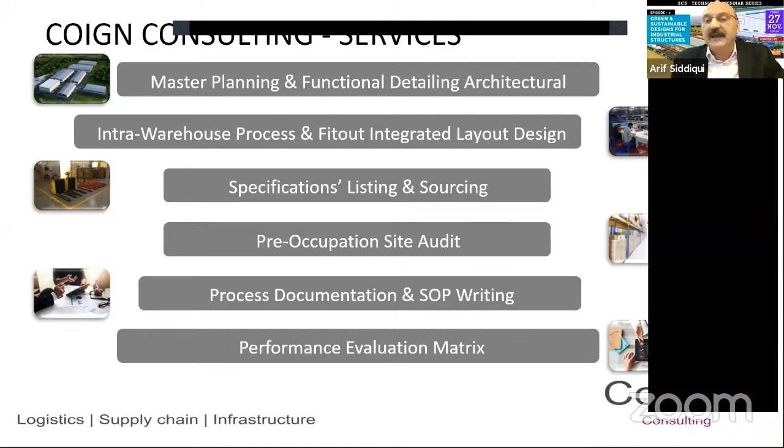Just to quickly mention what we as an organization do: Coign Consulting provides master planning and functional detailing architectural services, intra-warehouse process and fit-out design, designing pre-occupation site audits, and performance evaluation matrix as part of our various services. We serve various industry segments including developers, pharmaceuticals, chemicals, e-commerce, automobile ancillaries, FMCG, and heavy engineering. These are some of our clients across various sectors.

The project we are here to introduce is the SIA Infralogics LLC project, a standalone building in the city of Raipur. SIA was established in February 2017. The main objective of the company was to develop sustainable infrastructure in various parts of the country, which would then improve the overall efficiency of warehouse operations.

This facility is in the Naya Raipur area, where Raipur is amongst the cities that have been declared a smart city, focused as a 21st century city with the socio-economic and cultural life of Chhattisgarh, basically to improve the overall status there in the city.

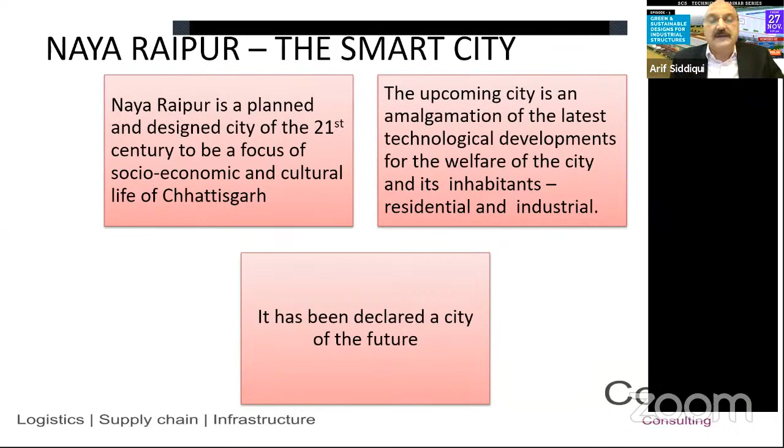The project overview: it lies in the south of NH53, about 1.5 kilometers away from the city. It's typically an integrated warehouse facility for ambient and air-conditioned storage. Total development is about 147,000 square feet. Warehouse capacity is about 131,000 square feet, and the land use is warehousing.

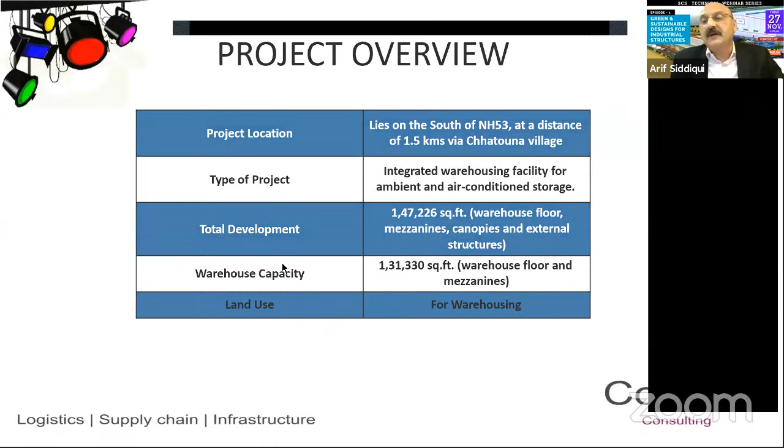The overall purpose of this facility, in terms of the green initiative we've taken, is to create a sustainable design in line with green building concepts to fundamentally reduce the overall impact of the building on the environment, improve human and worker health in the operating environment, and ensure the natural environment is enhanced through efficient use of energy, protecting occupants' health, and improving employee productivity. Obviously, reduction of waste, pollution, and environmental degradation has always been the key objective.

In a warehouse where we feel only a few people work, you'll be surprised to know that in a 100,000 square feet facility, there are sometimes more than 300 to 400 people working. Therefore, human health becomes a very important aspect and element as part of the green concept.

So green buildings predominantly focus on energy efficiency, water efficiency, a sustainable site, and material and resources. All these elements put together form a nice conceptual mix, the reason for creating green buildings.

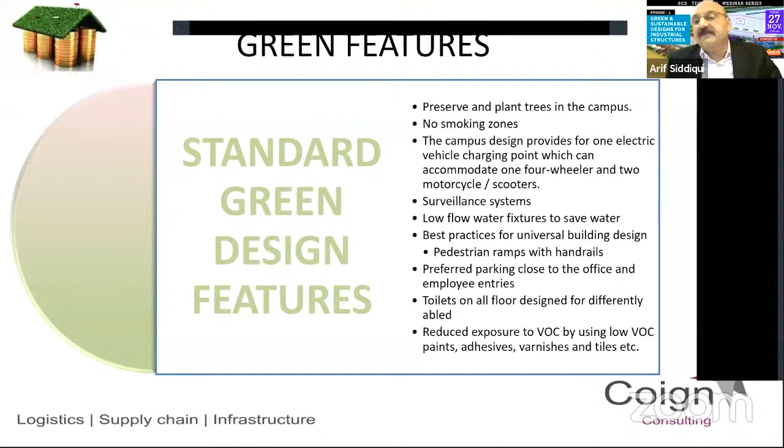Post-occupancy waste management is another very important focus of the design, making sure we separate waste bins for biodegradable and non-degradable waste. In warehouses, huge amounts of waste come up, especially packaging waste, so specific emphasis has to be put on segregation of recyclable and non-recyclable waste so they are easily segregatable.

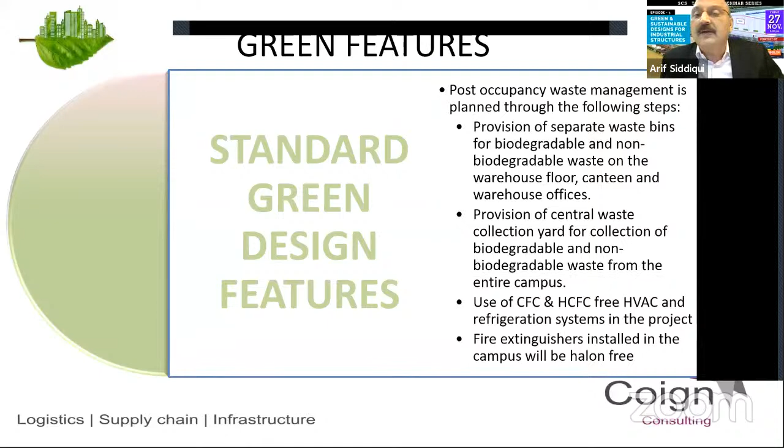Provision of central waste collection yards, use of CFC and HCFC free HVAC and refrigeration systems, especially for cold storages and air-conditioned warehouses. You can imagine the tonnage of refrigeration needed to cool 100,000 square feet of warehousing facility that is 14 to 15 meters tall, and the impact that careless CFC and HCFC mixes can have on greenhouse gas emissions.

Other important features here include use of local material, specifically sand, stone, aggregates, and bricks, to reduce pollution generated by trucks bringing material from long distances. Also, in terms of concrete, the use of locally sourced concrete as per project requirements.

Also, we need to make sure all local resources like cement, glass, wood products and tiles are sourced as locally as possible, so as to reduce the transportation leads that otherwise add up to a lot of carbon emission.

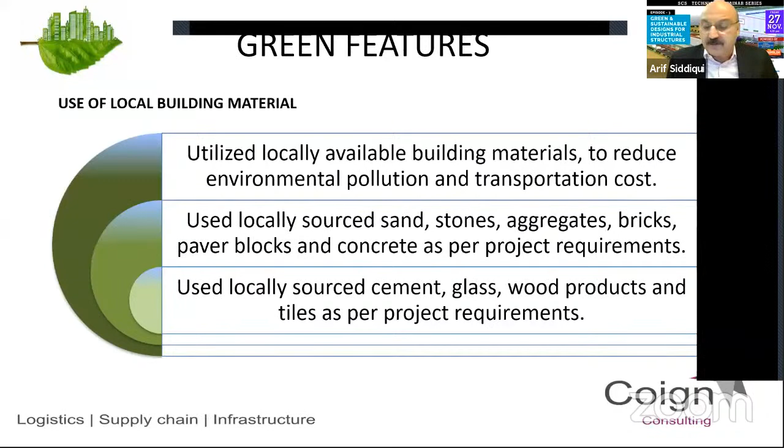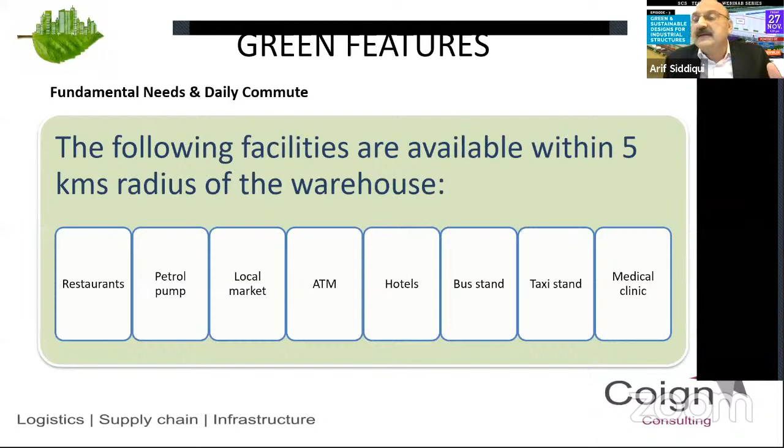The project has provided a lot of amenities for the fundamental needs of clients and people working in these warehouses. It's the client's endeavor to promote cleanliness and basic hygiene. The primary facilities within the campus are medical facilities, canteen, water drinking facilities, driver dormitory, and washrooms. Also, within a 5-kilometer range, there are restaurants, petrol pumps, hotels, and ATMs, so people don't have to drive long distances for day-to-day needs.

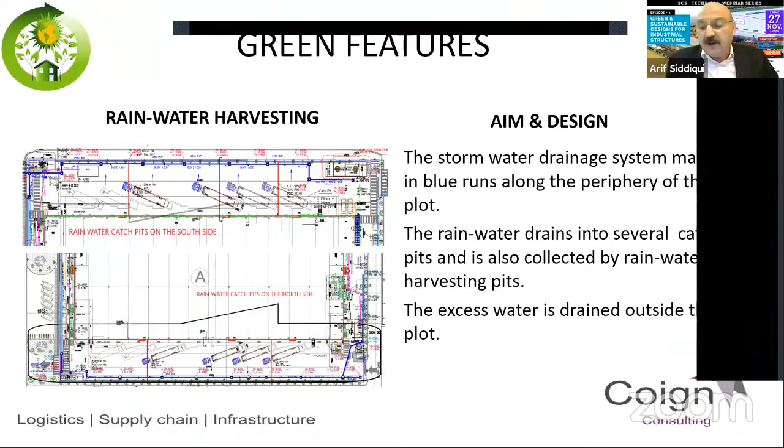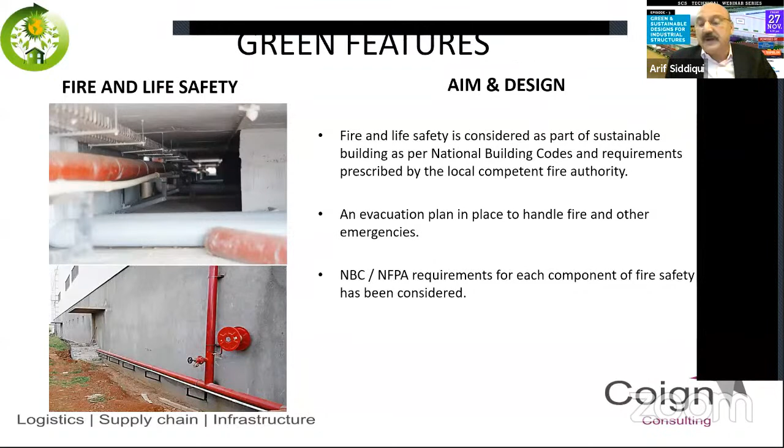Fire safety systems are designed to ensure safety of life, cargo, and the building. Fire and life safety is considered part of the sustainable building design, as per National Building Code requirements. Total evacuation plans, NBC and NFPA requirements are fully complied with to make sure goods and humans are taken care of, along with vehicle parking provisions for good, safe, and dedicated parking for different types of users, specifically trucks.

Traffic movement is all unidirectional so there is no conflict of vehicles. Large trucks have huge blind spots in the front, rear, and sides, so unidirectional movement is the safest method of travel, with bikes and cars on one side and trucks on the other. The design isolates human traffic of small vehicles and bikes from goods carriers, which are heavier vehicles, with unidirectional flow avoiding any conflict from U-turns and two-way movement.

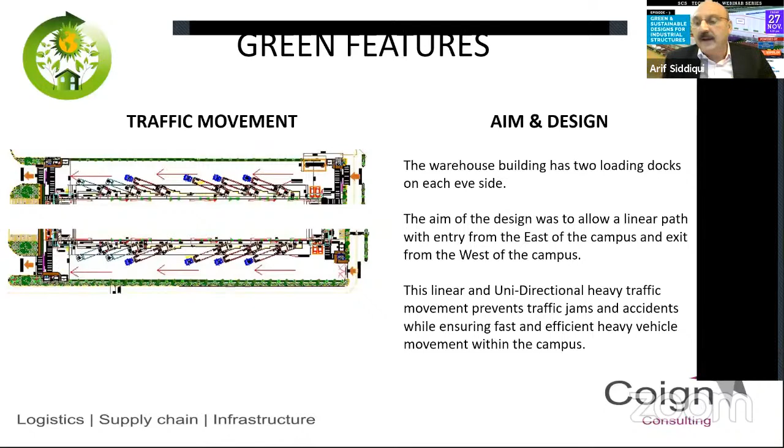Efficient loading and unloading bays are an extremely important element that helps optimize material handling and reduce lead time. It leads to huge safety gains and efficient loading and unloading of vehicles and material, and most importantly, worker safety. So you get speed while staying safe when moving material or loading vehicles.

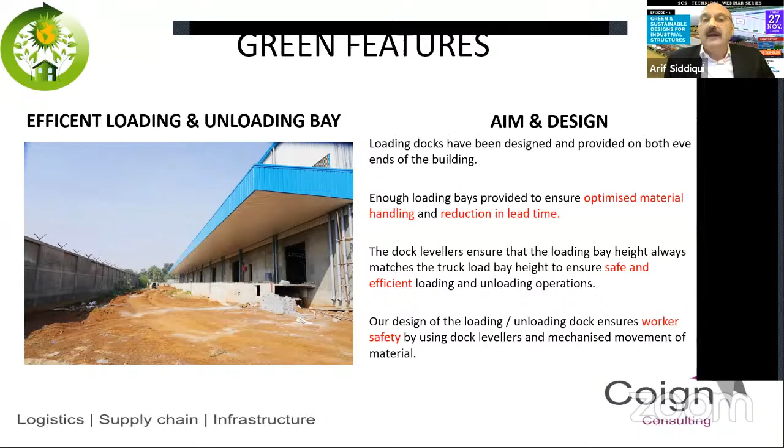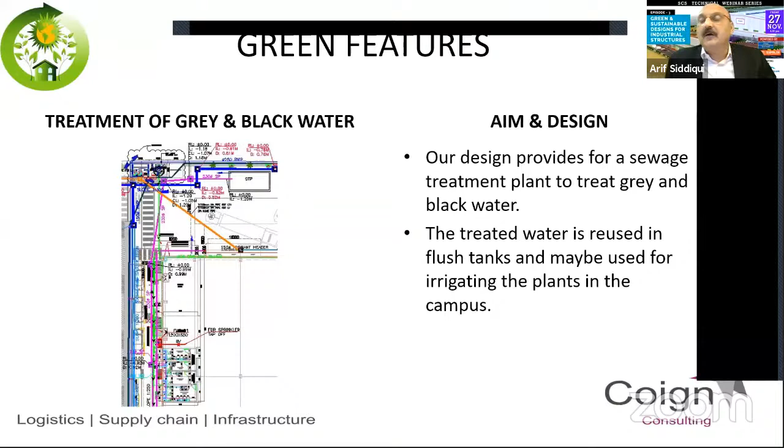Treatment of gray and black water is very essential. Sewage treatment plants are needed since potentially 200 to 300 people can be working in a facility of approximately 150,000 square feet, and the wastewater generated needs to be treated and recycled. So there is a provision for a sewage treatment plant which treats the water.

Here are some energy management systems, like natural lighting. These are continuous strips of natural skylights which help reduce electricity consumption during the day and optimize the use of natural lighting. The insulation you see is bubble wrap insulation, which helps reduce internal building temperature.

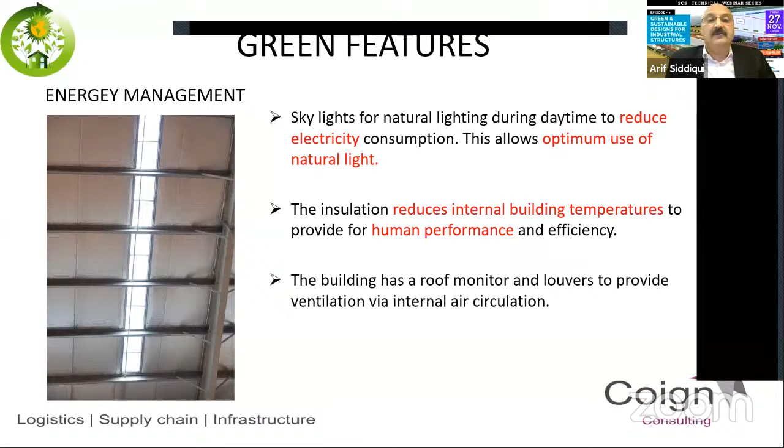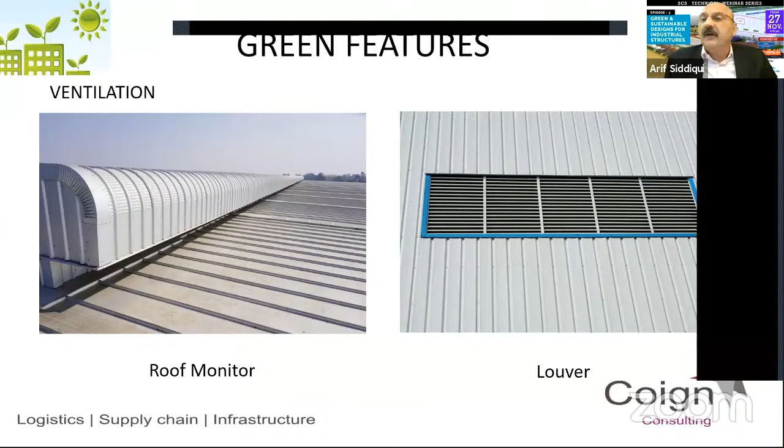This tremendously improves human performance in a warehouse. We have seen efficiency of human workers in the warehouse grow by over 30 to 35% just by ensuring proper control of temperature. This is a non-energy-consuming method for good air circulation, using ventilations like roof monitors and louvers for ingress of air, and roof monitors for evacuating or ventilating air outwards.

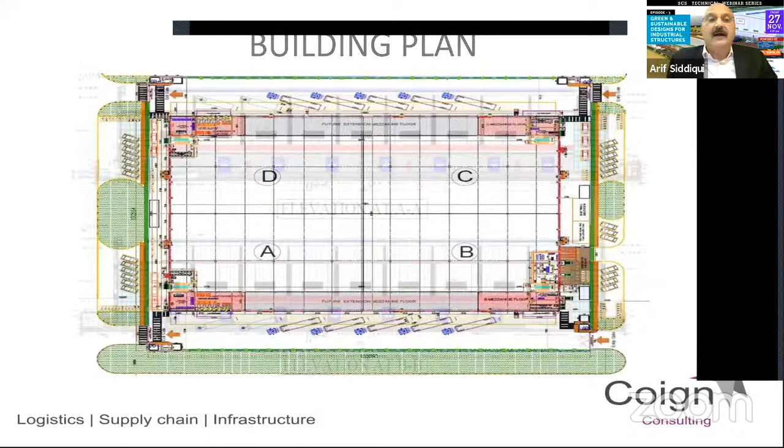Thank you very much. The key, as I said, is to ensure that even small manufacturing and small warehouse developers are able to get sustainable infrastructure developed. Sustainable infrastructure is just about these few details.

It's not about investing lakhs and crores of rupees extra. It's just ensuring that you are able to take care of human safety, material safety, and ensure that all environmental elements are within control and within the green building concepts and guidelines. Thank you very much.

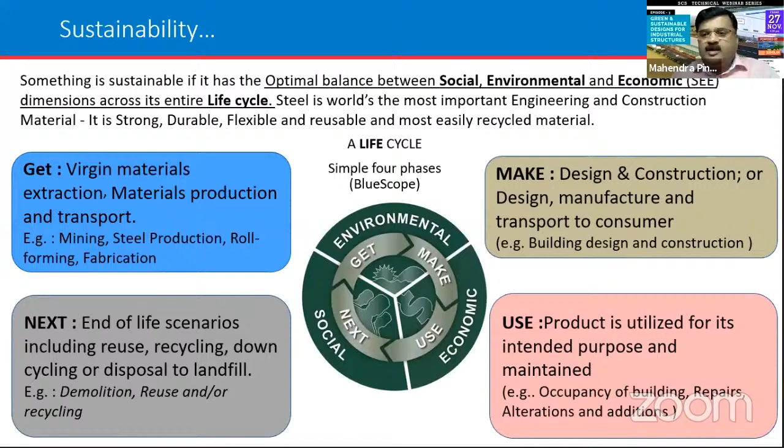Tata Steel BlueScope Steel are big companies having a joint venture between Tata Steel and BlueScope Steel. Since 2005, this company exists in India and manufactures coated steel products and PEB buildings for construction and all types of applications. These companies focus on safety, manufacturing excellence, quality, innovation, and research and development.

Now coming to the topic of material selection for roofing and walling. I am giving some tips which can help architects, consultants, or specifiers or end users who are not going through the architect channel - the consultant channel. They give the building to PEB contractors who build the buildings, but they have to be aware of what kind of material gives durability so they can have less or zero maintenance over time. There are different types of materials - I won't go into old thatch roofs, but we talk about coated steel versus aluminum. Aluminum sheet is also used for roofing applications along with zinc aluminum alloy coated steel, or color bond steel.

Mr. Kulkarni, I feel we have lost Mr. Mahendra Pingle's connection. Oh yes, he's back. Hello. Hello, yes we can hear you, Mr. Pingle. You are reconnected - can you please start sharing your screen? Yes, okay. Yes, okay.

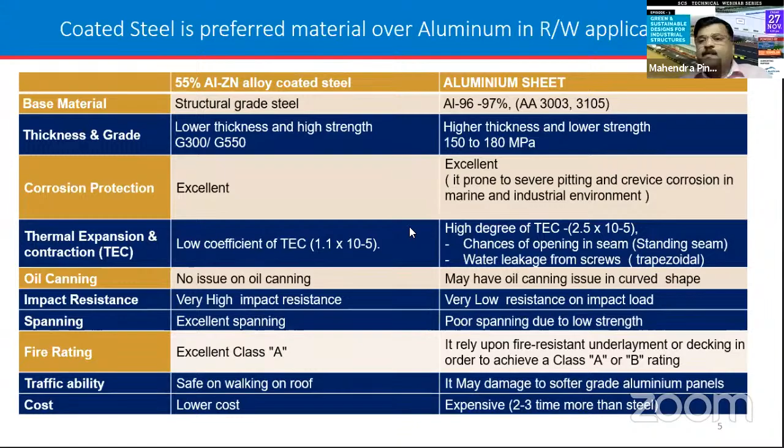We've lost him again, I suppose. Connectivity issues, I think. Shall we go to the next speaker and get back to Mr. Pingle later? Yeah, that would be better. Mr. Pingle seems to be having some connectivity issues. I think he will positively come back, and then we can continue with his presentation.

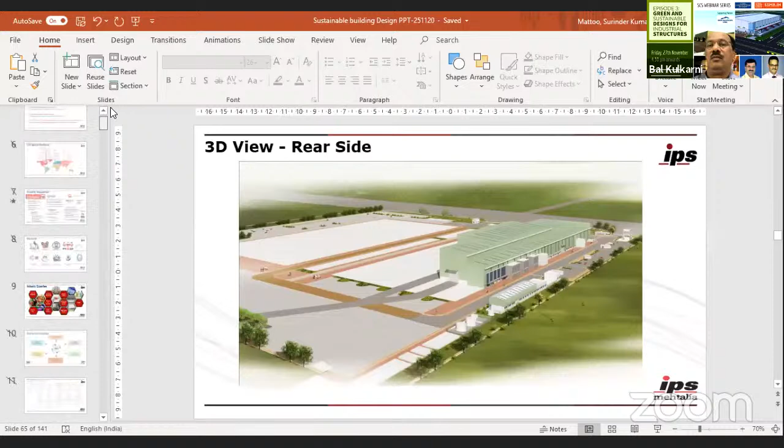Mr. Pingle is back. Good evening, everybody. This is a great pleasure to discuss our capabilities and the prestigious project we have done with Godrej Boyce at Dahej.

Mr. Arif has touched upon green building initiatives very discreetly, and we are not away from that. We also believe those are the current requirements of the industry, that we have to be sustainable and use all initiatives towards a green building concept.

So I will take some time to introduce IPS Mehtalia to all. Our safety logo, Mission Zero, is committed to an incident and injury-free workplace. We care about our employees' safety as well as project safety, so we inculcate all safety measures into our detailed designing while we go forward for any project.

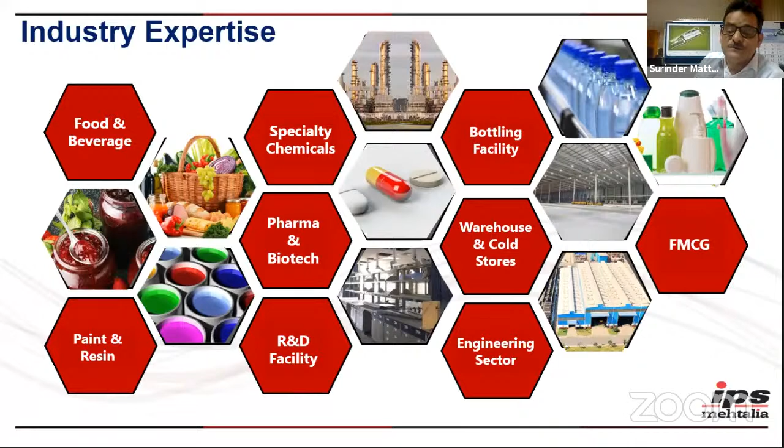These are the sectors we are into: food and beverage, paint and resin, warehouse, cold storages, engineering sector, FMCG. We'll be discussing the engineering sector project. This is our pan-India presence for industrial projects, where Godrej Boyce is one of the prestigious projects for us.

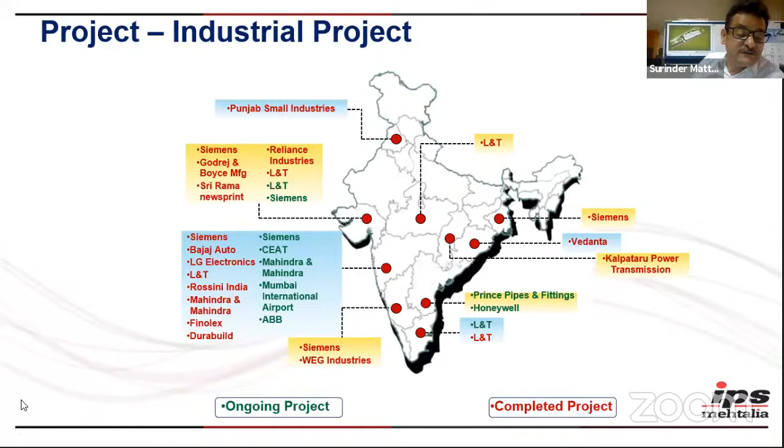So again, the sustainability areas we take for different projects: it starts from site selection and planning, water conservation, energy conservation, material conservation, and innovation in design. I'm touching upon the various points which accredit for certification from silver, gold to platinum.

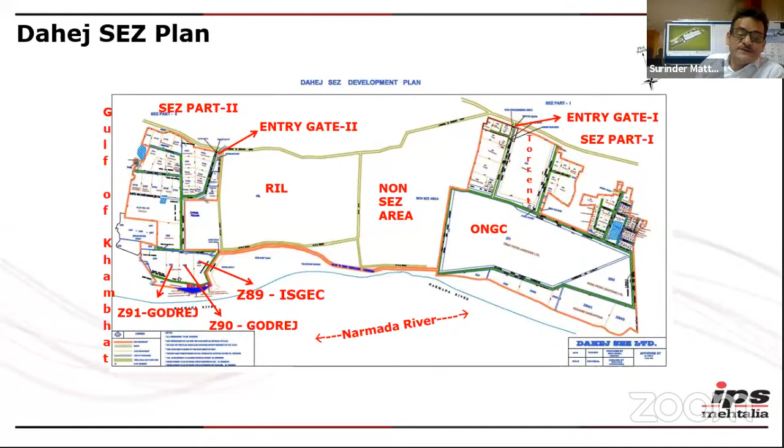Now coming to the subject of today's presentation, the Godrej Dahej site. I will take you to the master layout of SEZ 1 and 2. Our project is at SEZ 2 - the total area is divided into two SEZs, SEZ1 and SEZ2, and Godrej Dahej is in SEZ2. This is the aerial view of our location, Z90 and 91, you can see.

While master planning, these are the major points kept in mind: we have used the contours of the area very significantly, we have abided by all the safety statutory norms of the SEZ, the requirement and process flow from the client side, unidirectional man-material movement and process requirements. We have done the planning so utilities are optimized and the distance between utilities and user points is minimal to save on energy.

The facility is constructible because it is going to be phase-wise, and it is expandable without least disturbance to the operations which are ongoing. So that has been kept in mind while designing the facility. Logistics is a requirement that has been taken care of. Safety norms and all sustainable measures and green building concepts have been taken care of while designing this facility.

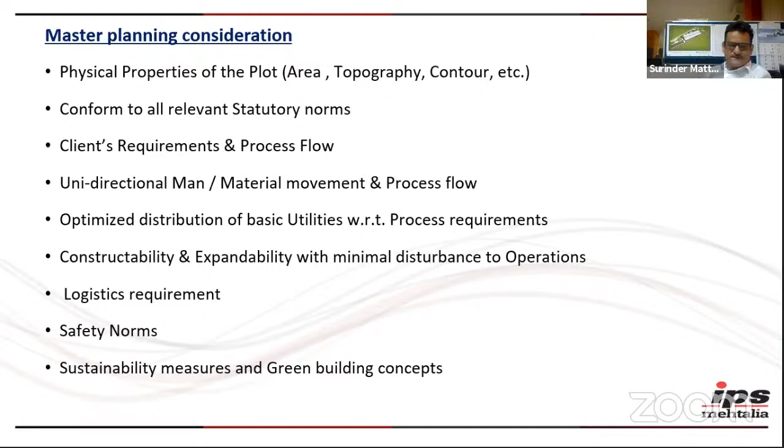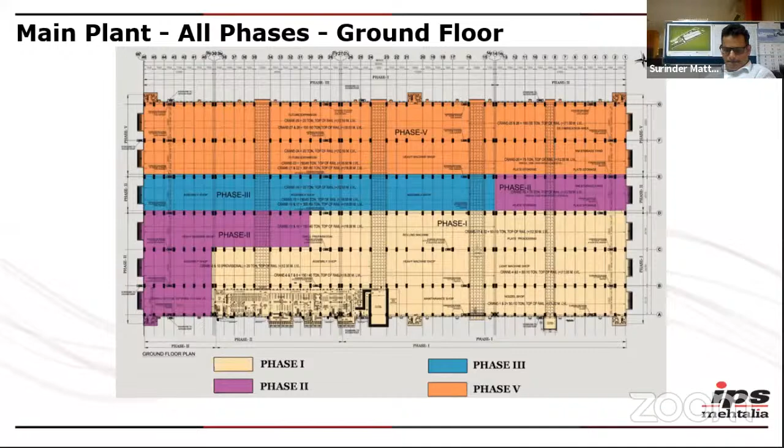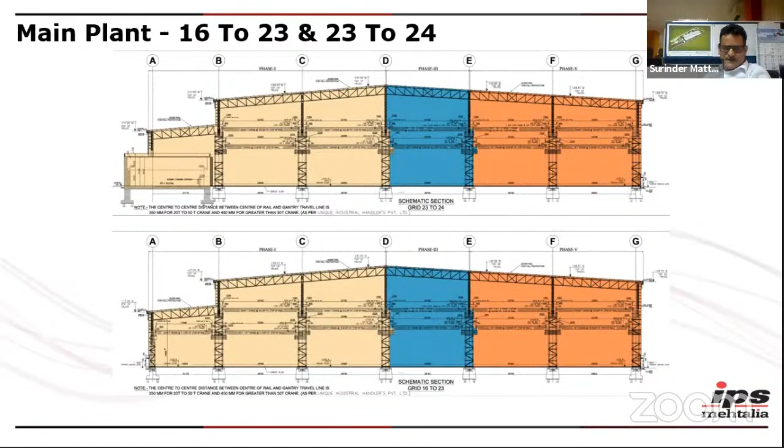You can see the typical section putting phase 1 and phase 2 together. It has got multiple cranes as a process requirement at different levels, with capacity from 10 ton to almost 200 metric tons.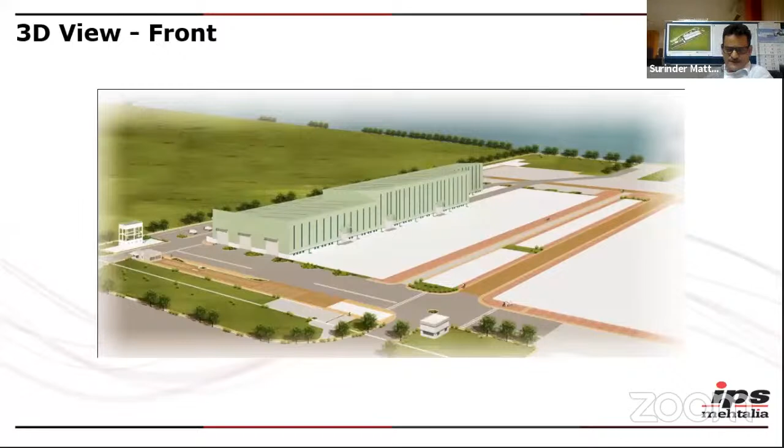Let me take you specifically through phase 1. This is the 3D view of phase 1, which has been constructed. This is again the south side view of the plant.

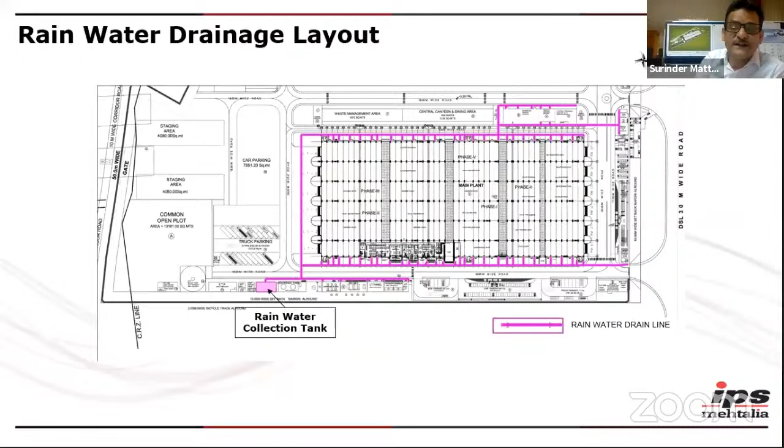Coming to the green initiatives, all the stormwater drainage network is planned efficiently so that future expansions are also catered for, with the level and distribution of the network kept in mind from an experimental point of view. We are harvesting rainwater from the rooftop, which is being used for flushing and gardening. That is one of the initiatives done for this project.

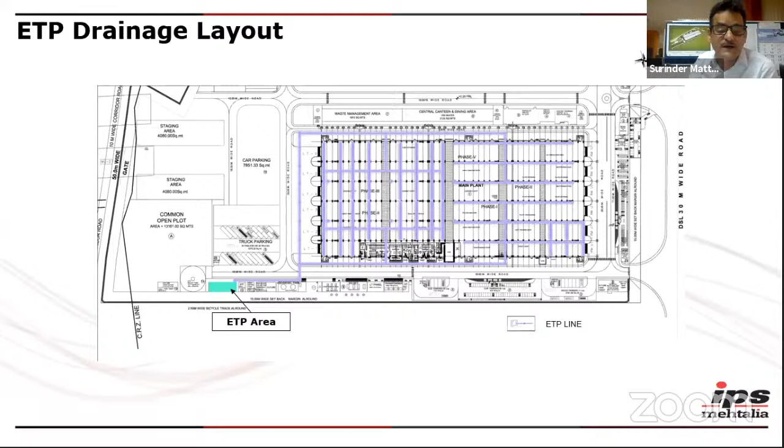We have got ETP and STP well defined to take care of the plant's treatment needs.

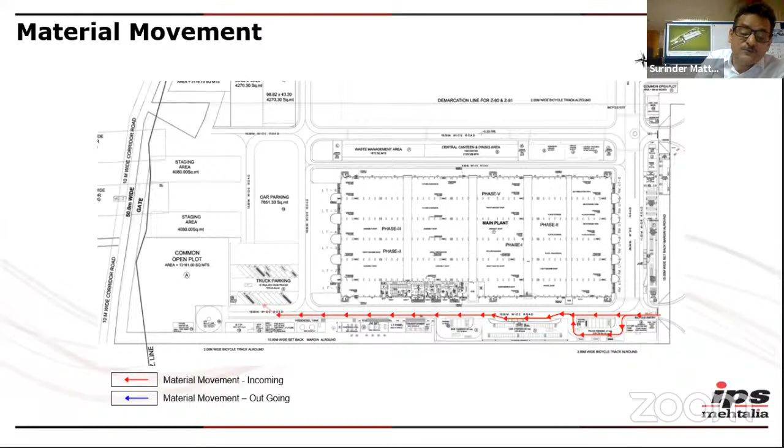Material movement has been meticulously derived so that there's no crisscross of inbound and outbound traffic, showing efficient material movement. You can see the outbound and inbound are very discreetly clear, not touching each other, and getting out very finely.

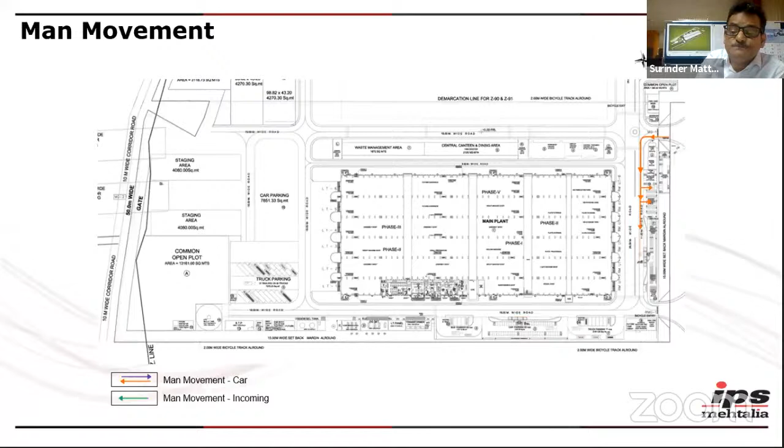This is the man movement, again no crisscrossing, very safe. And this is the car movement within the plot.

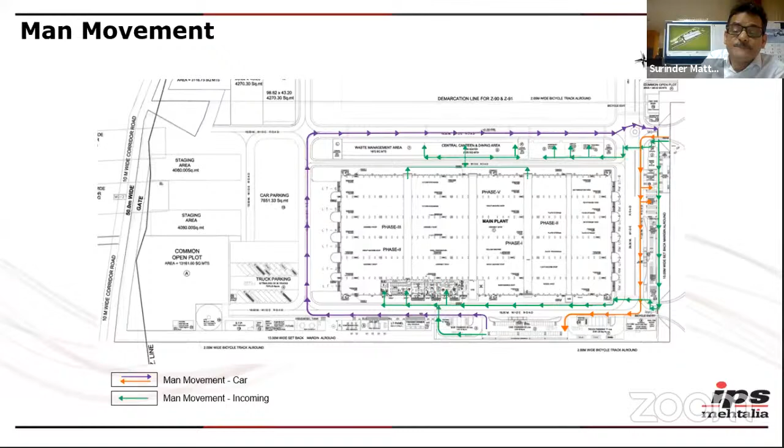In this project, though it's a vast project, we cannot compress everything into very few points. There have been many challenges which we have mitigated time to time.

Inside the facility, there are heavy equipment foundations for process requirements. We have got some testing areas, radioactive testing area enclosures, where the wall thickness required as per design was up to 900 mm. We have got EOT cranes, which I showed in the slides.

They are designed for tandem operation, so those forces which will be acting have been catered for and taken care of while modeling.

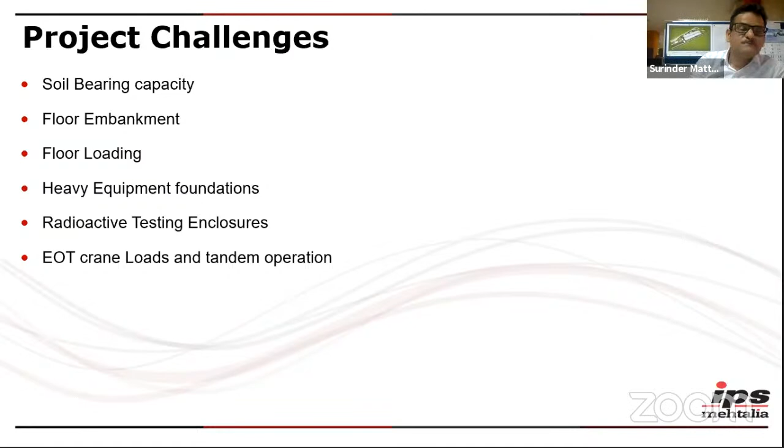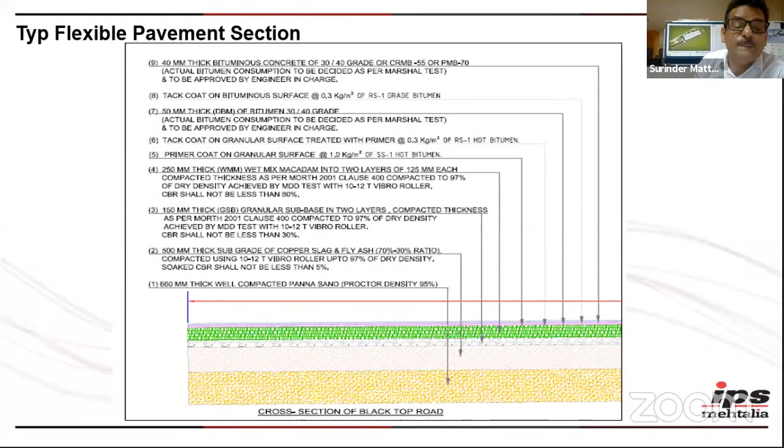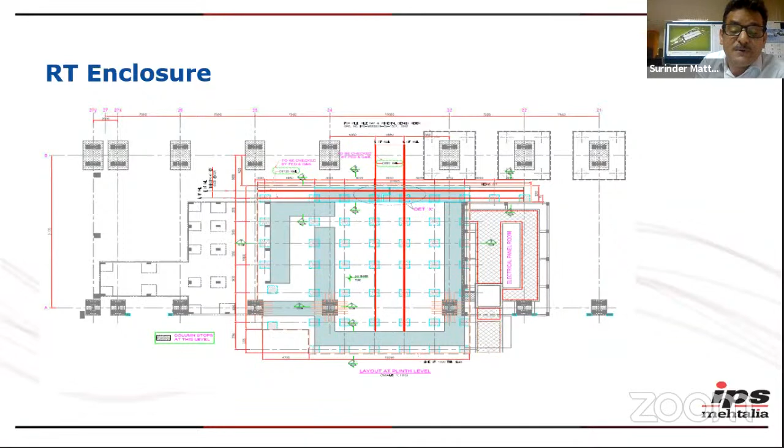This is one of the photographs of the RT enclosure where the wall thickness record was almost up to 900 mm. This is the RT enclosure, a typical design we have done to ensure air circulation within the shed.

There are many project salient features, and these are some of them which I will touch upon. This is a state-of-art fabrication facility for Godrej Process Equipment Division.

All sorts of safety aspects are adopted, with safe access to the roof and fall protection measures. We have got Latchways fall protection, and Skyweb used, of course from Tata. We have got horizontal and vertical cross movement of the job, which is possible on the floor.

Floor loadings are a tremendous requirement, as well process, which is 30 tons and 20 tons per square meter, and heavy equipment foundations having capacity to bend plates, I would say 100 mm and above. So that foundation design was one of the key factors, a key challenge for us, which has been resolved.

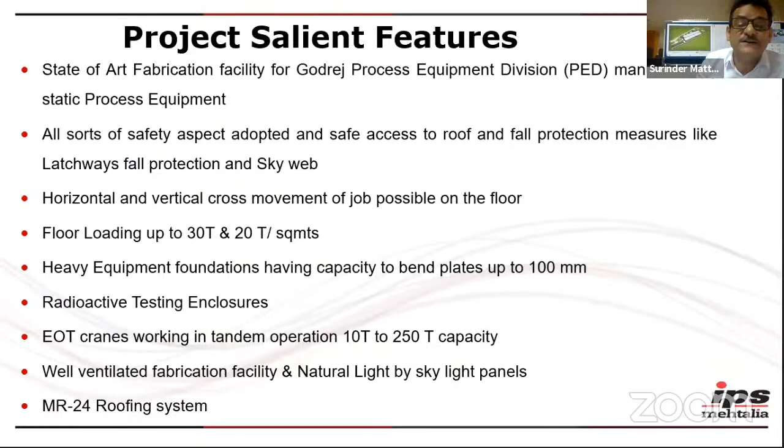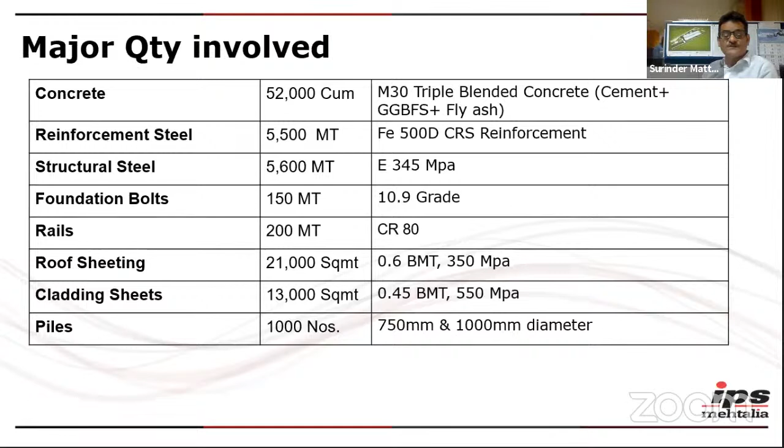The key quantities involved in this project: concrete is almost 52,000 cubic meters. For reinforcement, FE 500D CRS reinforcement has been used, almost 5,500. Structural steel has been used to a great extent, 5,600 metric tons. Foundation bolts, again 10.9 grade, 150 tons. So a lot of steel has been used to make this possible.

Now I will take you to some of the site photographs. This talks about the road which connects from Hazira to this SEZ.

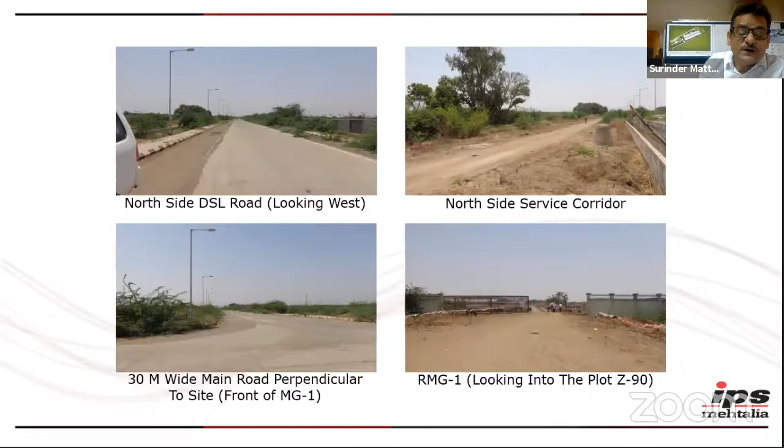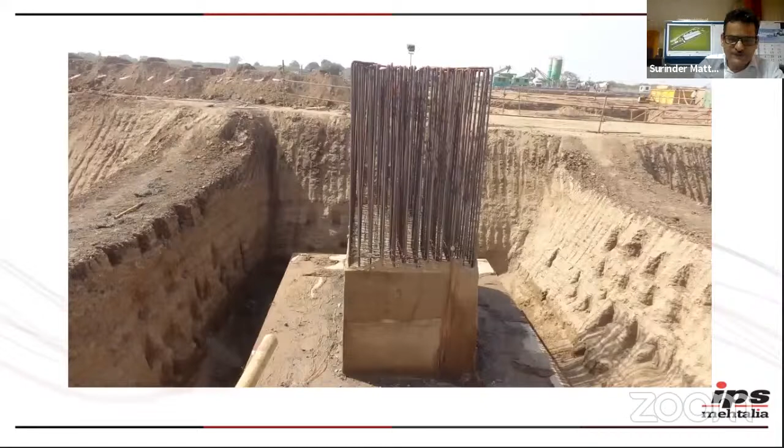So this is one of the pedestals ready to be taken up. Here you can see the structure coming up with our steel, as per design. So this is the steel which has been used. Here you can see the seamless work.

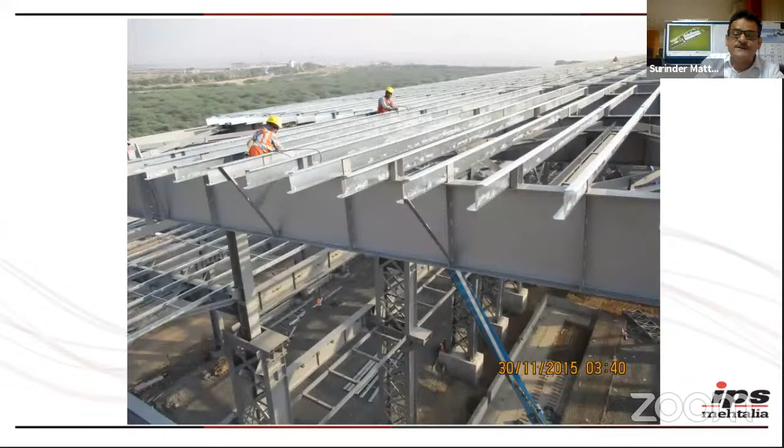So again, the internal photographs which show this. You can see the roofing system and the purlins being laid safely. This is another view.

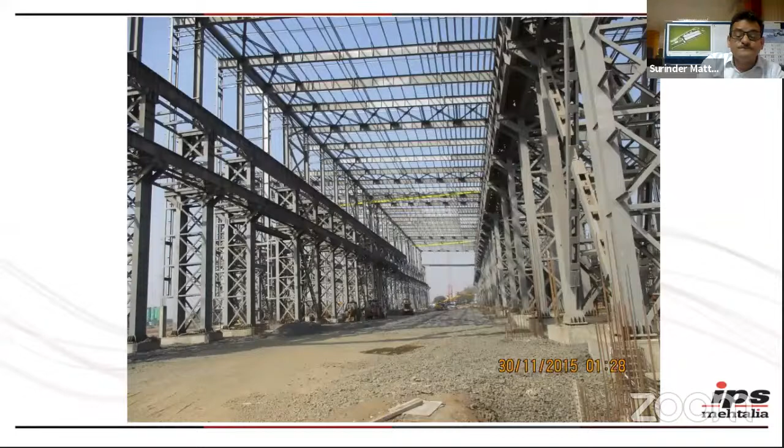In this picture, you can see one of the foundations done for the equipment foundation within the floor, and it could not have been possible once we were out after doing the roofing. So all the foundations coming inside were planned meticulously.

So this is another photograph. This is the final one of the pictures. It talks about the daylight, natural light has been encouraged, so that all operations go without using electric lights, and daylight is used in that operation.

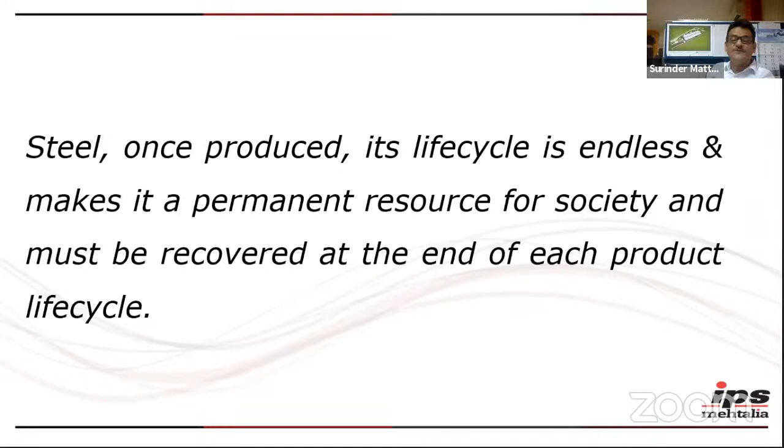In the facility, I can say that steel once produced, its life cycle is endless and makes it a permanent resource for society, and must be recovered at the end of each product's life cycle. So yes, these are the properties of steel. One should be proud having steel as one alternative for building solutions, which is part of today's discussion.

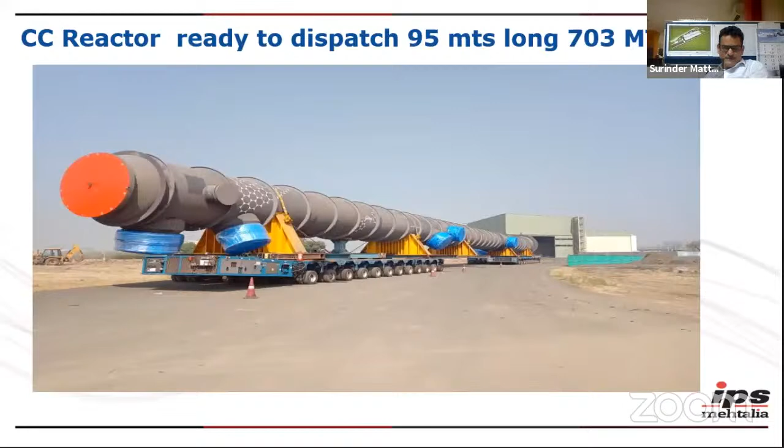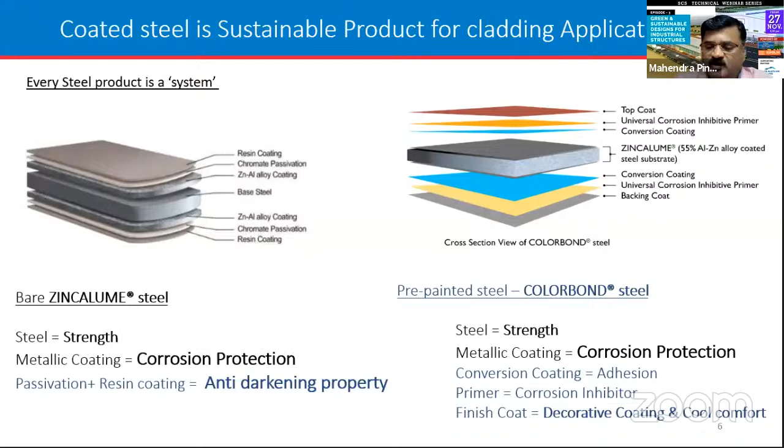If you talk about corrosion protection, it comes from the metallic coating, and the aesthetic and some part of the corrosion protection comes from the paint coating. So when designing the building, normally structural engineers take base metal thickness for consideration or calculating the material.

But if you talk about total coated thickness, TCT, it is the base metal thickness plus metallic coating. We call it total coated thickness. If you include paint coating on top of it, it's called total painted thickness. So when designing the building, the base metal thickness is important, and the additional part, which is corrosion protection and aesthetic, comes from the coatings.

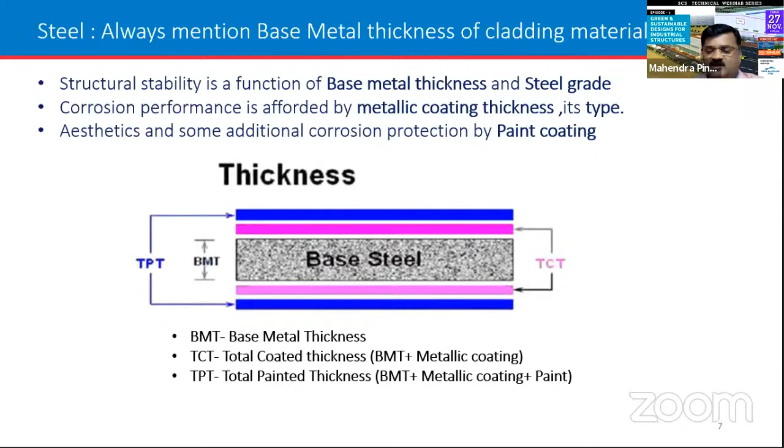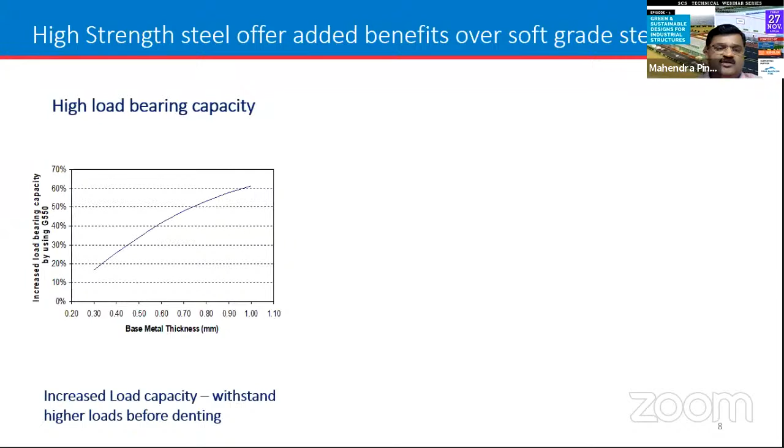This high strength steel is going to get the benefit. So when you are specifying it, what is the grade of the steel? High tensile steel gives more load carrying capacity, it can withstand higher loads, it has improved dent resistance, it is not easily dented, and it can have more spanning. So you can save some purlin structure by using high tensile cladding for the roof and wall applications. Next is how much coating we need to specify or mention in the tenders.

If you talk about zinc aluminum alloy coated steel, AZ150 is the minimum GSM of coating required, which gives 4 times more life than galvanized steel of 275. If you talk about 160 GSM galvanized steel, this product gives 8 to 10 times more life. So 150 GSM is the minimum. If somebody is looking for higher protection, then you can go with AZ200 type of coating, as 200 grams per meter square is the maximum we manufacture.

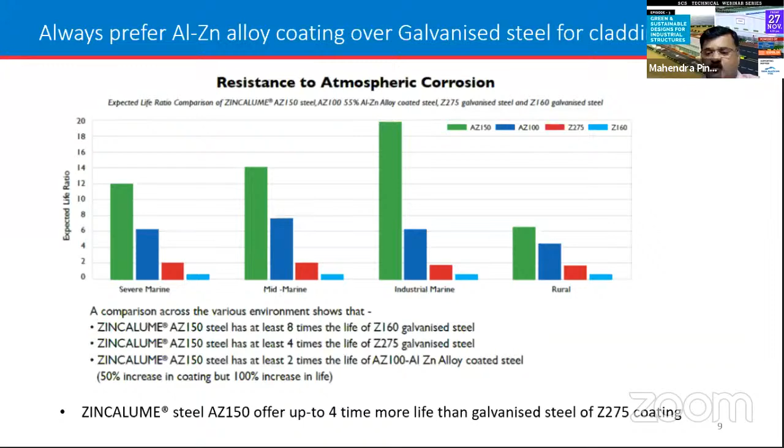When you talk about color coated steel, RMP, SMP, super durable polyester, and PVDF are the different types of paint available. If you talk about value for money, durability and all these things, super durable polyester gives excellent performance over RMP or SMP. PVDF, as you know, is too expensive, and it has some disadvantages about corrosion protection, lower corrosion protection, lower hardness, and poor opacity. When you do roll forming after color painting, the sheet gets some scratches on top of it, because of the poor hardness. But the best suitable paint system is super durable polyester, which gives close color performance to the PVDF coated product.

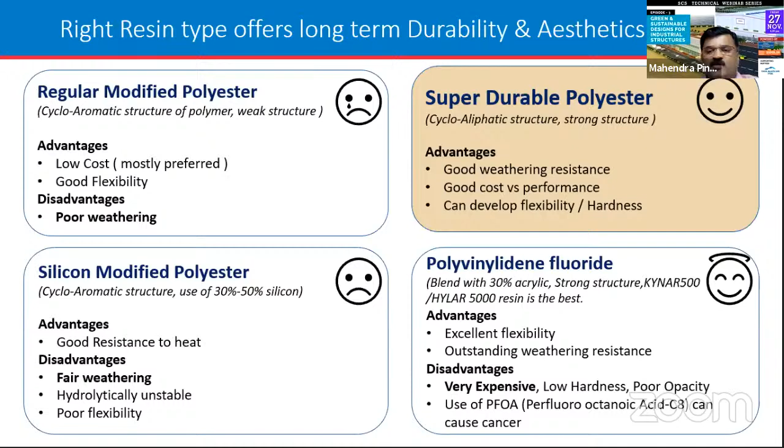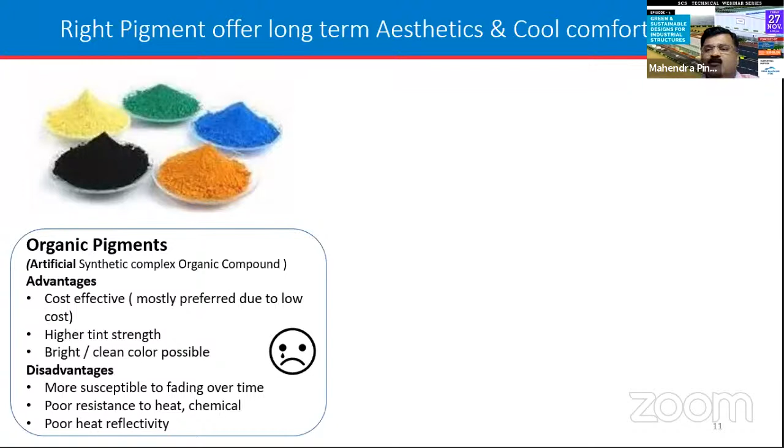Then comes the pigments part, because no one is going to go into detail about whether the paint is RMP or SMP, but we should go further into whether you specify organic pigments, ceramic pigments, or any type of pigments. Then the paint supplier or steel company has to supply that to meet your tender specifications. Organic pigments are very cheap, very low quality. They do not give long-term performance. They have color fading, poor color fading resistance. So you face a lot of problems over the period of time.

But if you go with inorganic pigment or ceramic pigment, and specify it into the tender, you will get the durability of it. So you are not leaving it to the paint steel companies to supply, you are demanding for it, and that's why they are going to supply to meet your expectations as per the tender specs. Then come to the thickness of the paint.

Normally cost cutting happens by providing less coating, say metallic coating or color coating. But if you want to get the right kind of coating thickness or durability, you have to have a minimum nominal 20 micron super durable polyester with inorganic pigments, over a 5 micron primer, and the same with the reverse, 5 plus 5 microns reverse coat. It has to comply with Australian standards or Indian standards, and that is what gives you the right kind of product. Lower paint thickness gives an adverse effect on performance, normally color fading happens and delamination comes out of it.

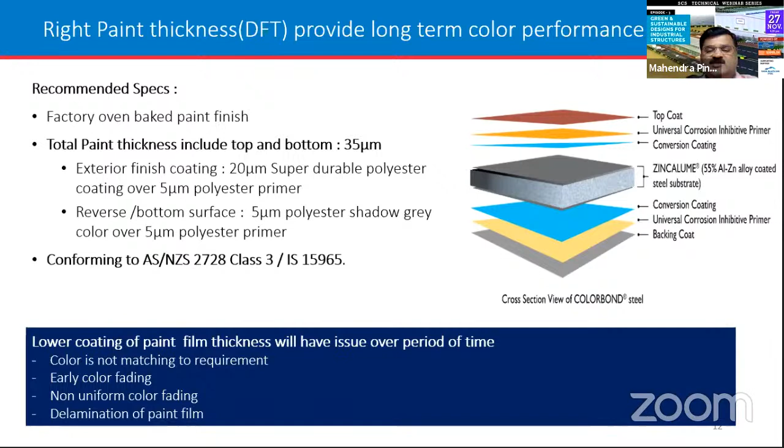So what is the color? Normally people say, I want to have my logo color. Logo color is normally bright colors, very clean colors. If you are looking for that logo color of a particular company, then it has to be manufactured using organic pigments, and then the color is going to fade over a period of time. But if you want to go with the right kind of products, sustainable, durable, and aesthetically pleasing for a long time, you have to go as per the manufacturer's standard colors, which is formulated with the right kind of performance. You should refer to a RAL color only as a reference, but you should not go for that, because not all colors are designed for exterior atmospheric conditions. You should go with semi-gloss, 20 to 25% gloss, instead of 80% gloss on the roof, to avoid glares.

Earthy colors are better than bright colors because earthy colors are normally made out of inorganic pigments and ceramic pigments. These pigments cannot be made in bright finishes, so it's an easy understanding. If you are looking for bright color, it's not going to have inorganic and ceramic pigments, which are durable pigments. And finally, nowadays pigments come with infrared reflectivity.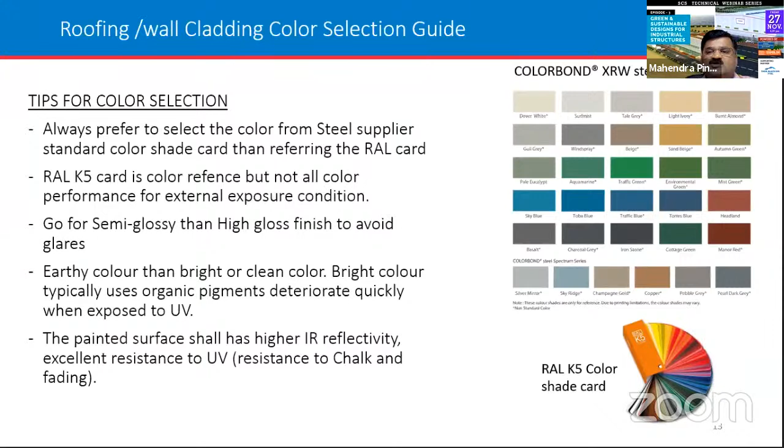We normally talk about cool roofing, where the pigments give the performance of cool comfort compared to others. This is what the Thermatech technology is about. Whatever solar heat comes in is reflected back to the atmosphere, and very low heat is re-radiated inside the building because the paint has Thermatech solar reflectance technology. That means the pigments used in Colorbond steel have infrared reflective pigments, which give cool comfort.

If you talk about sustainability, the energy consumption reduction is around 15%, and the peak roof temperature is lower by 6 degrees. That is the benefit you get. Since the sheet does not heat up that much, the thermal expansion and contraction will be low. The paint durability will be higher, and no cracks will develop in the paint system because of lower thermal expansion and contraction.

If you talk about the SRI value matrix, as per IGBC norms, the SRI value has to be more than 78 units. So you have to select colors with SRI value more than 78, such as Dover White, Surfmist, and pure whites. These are the colors with higher SRI value required for low slope buildings. If you are going for steep slope buildings, the SRI value required is about 29, where all colors meet the IGBC or green requirements.

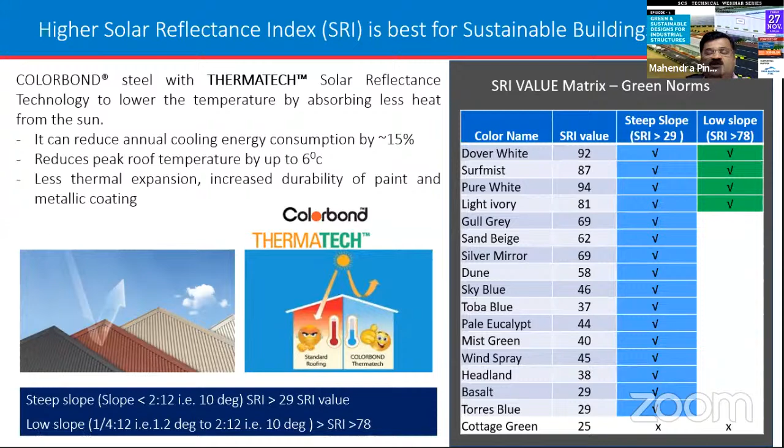Now, not only should you talk about warranties, you should also demand warranties, and check how much warranty they give for color performance - 10 years or 15 years - and how much corrosion protection period they offer. So you have to be very careful about what the steel supplier is giving you.

So if you talk about performance, it depends on corrosivity - whether the building is in a coastal region, an industrial zone, or a rural zone. As per ISO standards, corrosivity ranges from C1 to C4 or C5. But the Colorbond steel product range far exceeds the competitors' products available in the market.

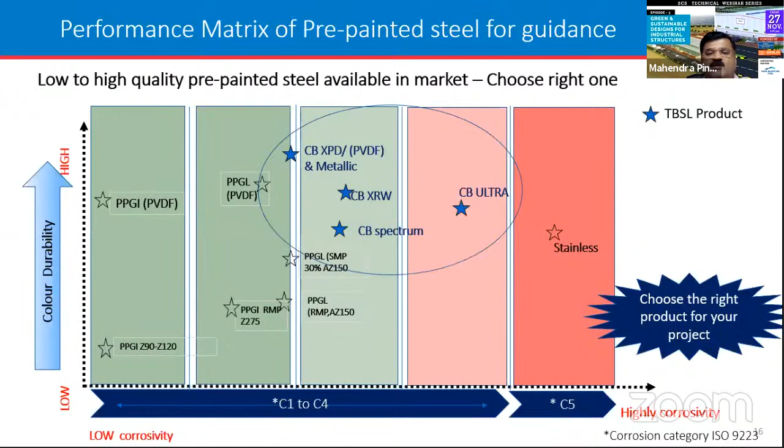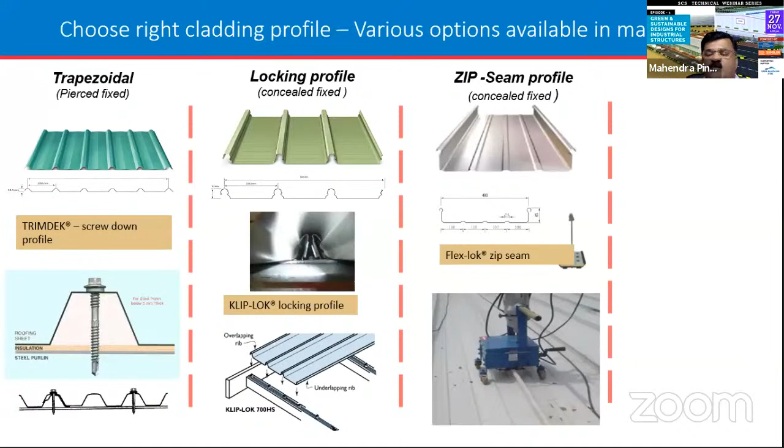This gives the performance suitable for medium type corrosion requirements. So talking about the profiles, there are different types - screw down profiles, locking profiles like Klip-Lok type profiles, zipping profiles, and 360 degree seaming profiles. These are the different types of profiles available in the market.

You have to choose the right one. Which one should we choose? There are some technical comparisons. Normally the standing seam type of profile is available in the narrow version, and concealed fix and pierce fix are available in the wider version, depending on the slopes and other factors.

But concealed fix and standing seam profiles require skilled labor, design detailing is required, and fixing is very critical. We have to take care of the measurements, and the structure has to be aligned. If there is undulation in the structure, the standing seam or zipping or concealed fix Klip-Lok profile type is not going to fix properly. So we have to take care of how much tolerance is in the structure.

So in terms of performance and cost, the concealed fix Klip-Lok profile is superior to standing seam profiles, I would say, because it's proven in Australia. BlueScope Steel only recommends Klip-Lok profiles because it's economical and sustainable, and you can save on structure and cost because it's manufactured from high strength steel, reducing the steel on top. So these profiles you're selecting have to be tested.

Steel roll formers should not do the practical testing in your building. They should be tested at some recognized laboratory and give a performance rating, so as to avoid all the wind uplift and pressure issues.

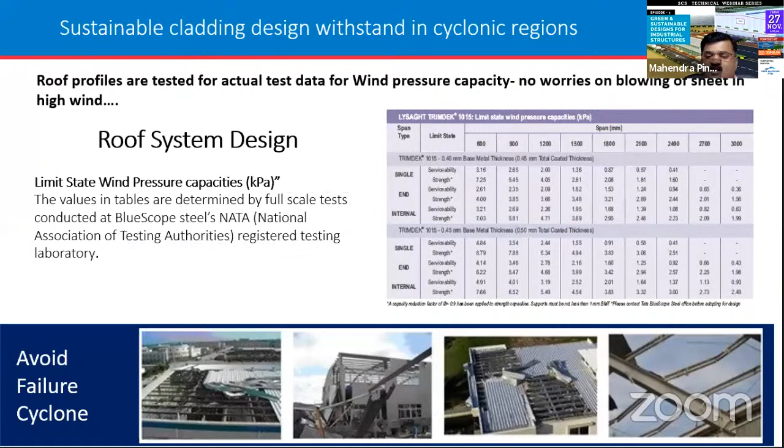So at Tata BlueScope Steel, the profiles we are offering are all tested with real values at a proper laboratory. We should not ignore this, because sustainability comes when you talk about insulation or temperature reduction.

If the flashings or accessories are not taken care of properly, there will be a problem with sustainability, and it will increase the electricity cost to maintain the building inside. So proper detailing should be taken with translucent sheets, where we get natural light and proper wind ventilation. Dust and rainwater should not come in.

The fastener should be the right quality, class 3 or class 4 type. Infill strips are mostly not used by anyone, but they should be used in the gap wherever there is a roof and purlin gap.

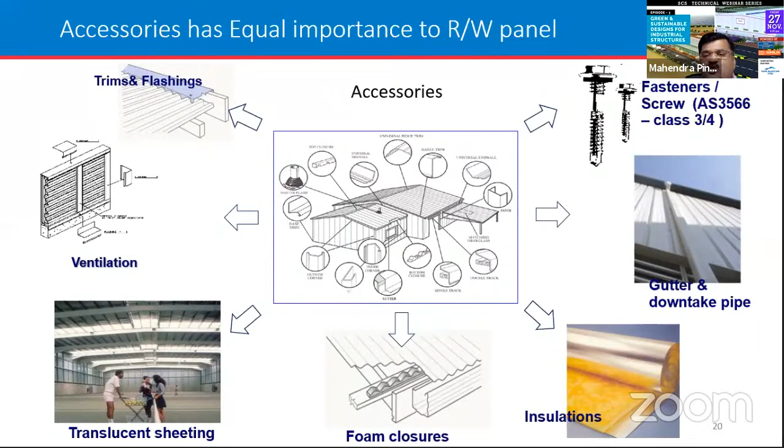For insulation, we should go with mineral type insulation, which gives durability. So if you draft the specifications, all the parameters should be reflected in your tender, so there won't be any play for the contractor to give deviations.

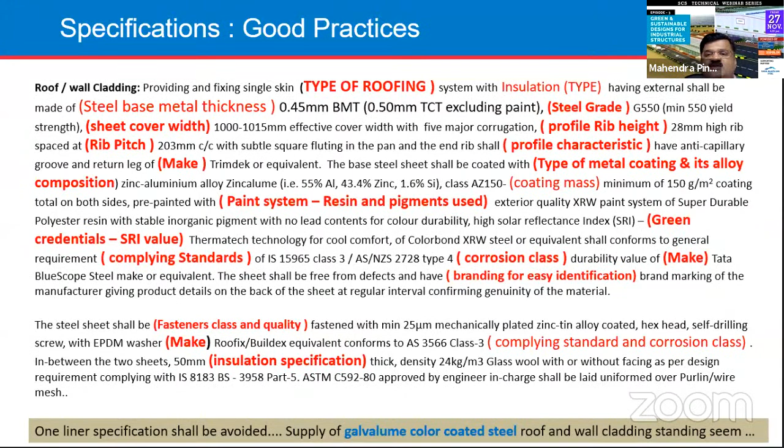If you draft the specification in such a way that all the parameters I explained are there, then you will get the right kind of product for your buildings, and it will save a lot of maintenance cost. So here are some facts I'd like to share over a period of time.

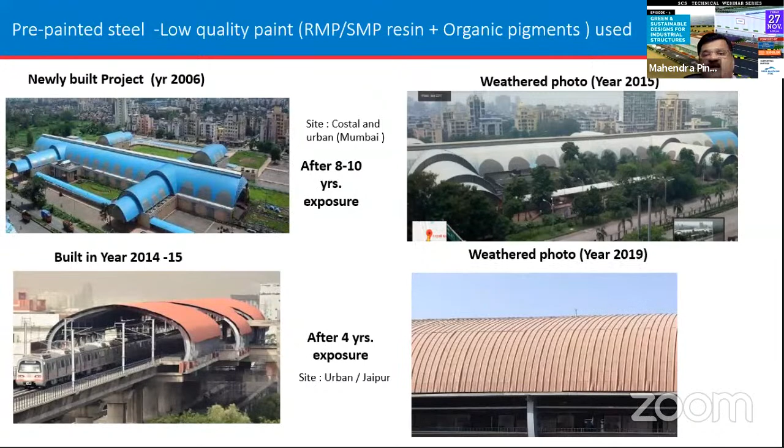The color performance -- I explained about inorganic pigments, organic pigments, and ceramic pigments. With organic pigments, color fading is obvious; you can see it within 6 to 8 years. So are we really making a sustainable building, an architecturally beautiful building, for a long period? This is the question that comes up.

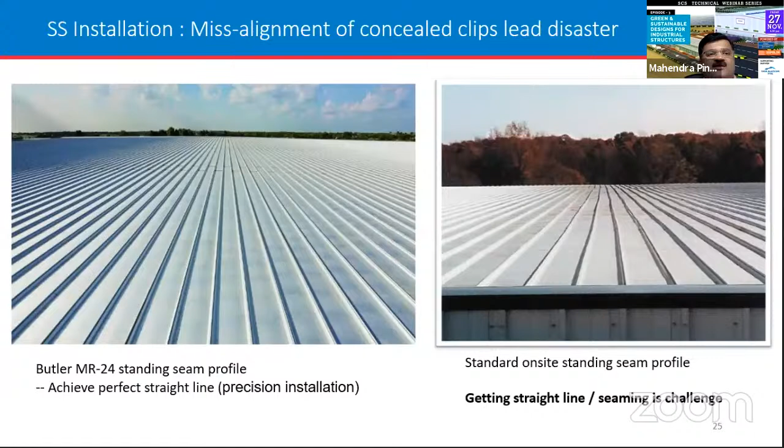I think Mr. Pingle is still having those connectivity issues. But yeah, there's just a few slides left. There is a problem today -- your screen is not visible, sir. Yeah, I'll just share the screen again. No problem, no problem, sure.

We have 3 minutes more, so the wrong selection of fasteners should also be taken care of, because stainless steel fasteners don't work, electroplated fasteners also don't work. Mostly on the roof external side you can see the fastener, but inside you can see the fastener is damaged. Your screen is still not visible, sir.

Mr. Kulkarni -- meanwhile, can we take up a couple of questions? Yeah, that is what I feel. We shall start with some question and answers, and by the time we reconnect and share the rest of the screens, we can go through those.

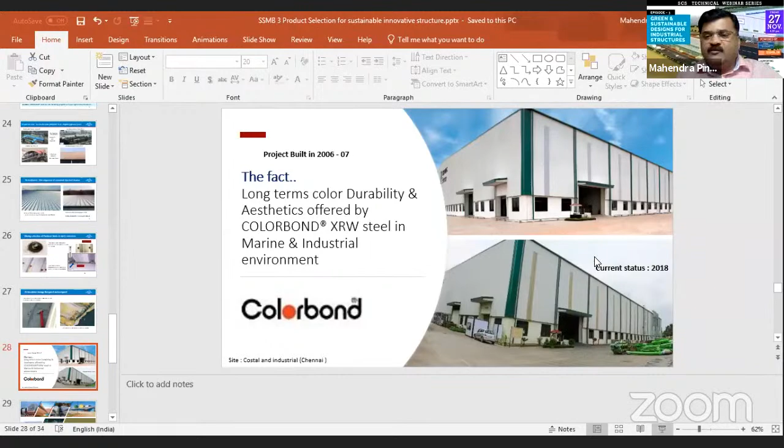Hello. Yeah, I have almost covered all the slides, but there are a few slides I'll just take you through. So the insulation, wet insulation damages the cladding material, and the performance of COLORBOND steel over 12 years of exposure doesn't have any problem on the color performance.

Some of the sustainable buildings are made in Australia. You can have a wide range of colors and structures, so it's not limited to box types. In India, mostly the buildings are designed as box types, but all processing industry can be built with beautiful architecture. This is the part actually architects should go for instead of going for box type structures, and conventional buildings should be making those beautiful structures.

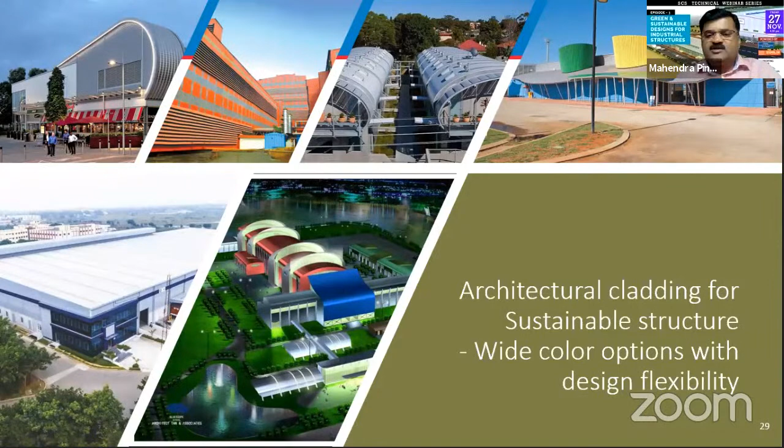Some of the buildings where PEB and conventional buildings use color bond steel and Zincalume steel because of the durability and aesthetics. Mostly MNCs are preferring this product because they know the performance of COLORBOND steel all over the world, since color bond steel is a brand very popular for its color performance. Some structures in warehousing industries and logistics have buildings that are getting sustainable.

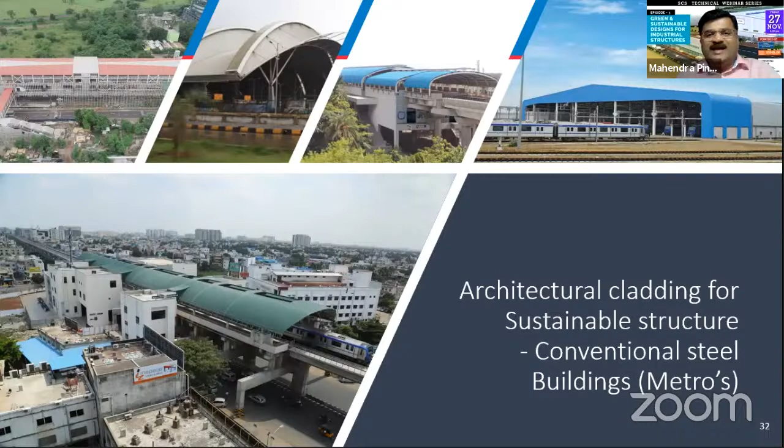You can have warehousing with a trussless type of roof or PEB type of roof or all sorts of things. It's not limited to warehousing, but it applies more to infrastructure projects where the structures have to be built in a conventional way, and the architecture comes out of that. That's what you mostly see in metros and airports. Some projects where aesthetics are important, color bond steel is the choice for architects and consultants. So that's the end of my presentation.

Now we can have some questions if they are related to material, we can address. Thank you sir, sorry for the inconvenience because of the connectivity issue here. No problem, yeah, I will just read out some questions for you regarding the materials.

Yeah, first is from Mr. Virendra Singh. Is stainless steel related products or roofing considered under green building as it's a sustainable product due to a lower life cycle cost?

You can see they are talking about the life cycle cost, but what type of stainless steel they are using. Different types of stainless steels are available, and why we should go for stainless steel. That is the point first, because coated steel is an economical option for building and construction, and if the site is really in an industrial zone...

So building is very, there the acid fumes are coming, so they can go for stainless steel. But for buildings near the coast where coated steel performs well, the problem is solved using coated steel. Wherever there is requirement, they can go for stainless steel.